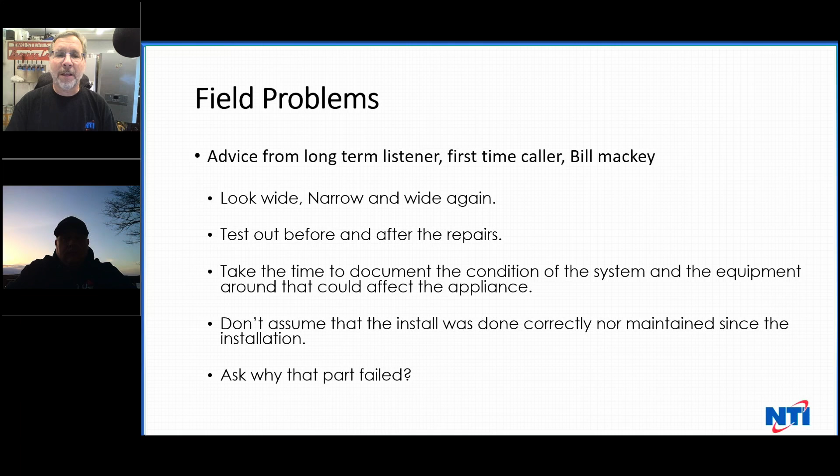Ted disappeared. Huh. Oh, he's back again. Yeah, I'm having some weird problems. Sorry. Okay. Well, it's all right, Ted. You were in a rush trying to get in here. I thank you for joining us.

So field problems. Advice from me on field problems. So this is how I look at things. Always consider first to call our technical line, 1-800-688-2575 extension 1. Reach out to your wholesaler's TSA group. They sold it to you, and most wholesalers have a technical service advisor group that will come out and actually help you on the job.

Now, see, that's important that you tell them that, because they need it. The wholesaler needs to be in the loop, because they're sometimes in the dark when they're talking to you and I or Ted. So they need to be in the loop. Yep. Consider calling your local manufacturer's rep. All of my reps have somebody technical on staff that can help you out and come to job sites. Ted's reps are pretty much the same way.

So we're here to help you, and they're here to help you. Always feel free to call Jason, Ted, and me. And I know for a fact that the other day one of my customers could not reach me, and knows Ted through 62 episodes of Thirsty Thursday, and he picked up the phone and called Ted. Ted helped him out, and I get a text message as I'm walking out of my corporate meeting that says simply, "Don't bother calling me. I talked to Ted and he solved my problem." Woo, it was great. It was excellent. And thank you, Ted, for doing that.

Sure. That's one thing. I mean, we got a great team, and we treat it like a team. And I've done the same for Ted. Ted and I have covered each other's butt. Jason's done the same for Ted and I. Jason does it for everybody. Mm-hmm.

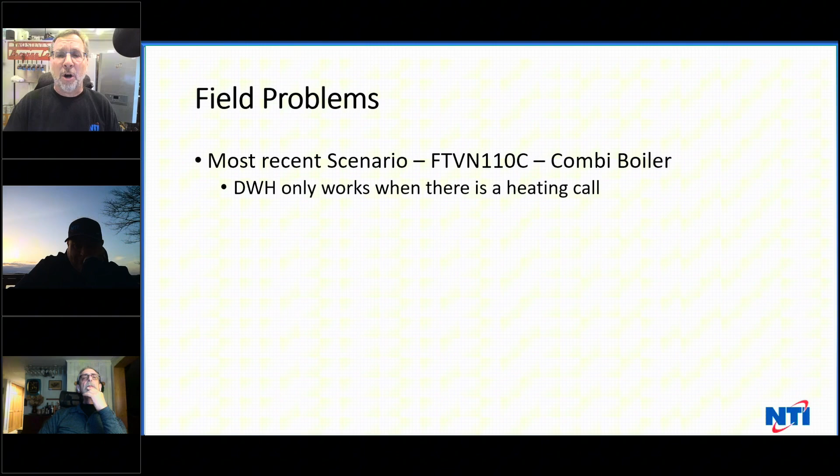So field problems. Here's one that I just had this week. Most recent scenario was on a FTVN 110 combi. I was probably 300 miles from my house. I had a great contractor who called me up, and she's just very thorough, very good. She's being thrown out on a lot of jobs for her boss that she didn't install, so she doesn't know what she's walking into. And she said the domestic hot water only works when there is a heating call on a combi. When there's no heating call, the boiler pressure drops to 0. So now it goes off on a low pressure error, which we know is a 108, but it doesn't matter. It's a low pressure error and the boiler won't fire.

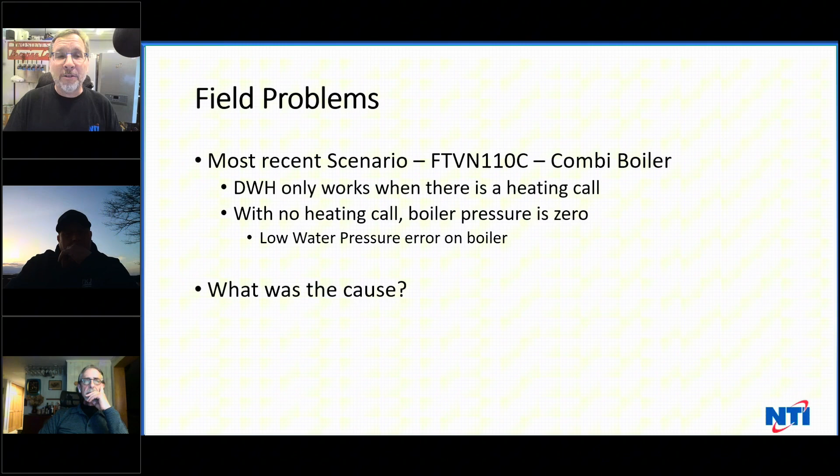What was the cause? So Jason, would you bring up poll question number 1? Can you, or do you want me to do it? Or Ted, do you want to do poll question 1? Who wants to do it? Let me get to it. I got it. Poll question. Ted can read it. I'll bring it up. Poll question number 1. Boom! Launch that bad boy. We ain't launched these in a long time. Quick poll here.

What is the zero pressure reason? What's the reason for that zero pressure? A bad fill valve, a bad pressure switch, a bad expansion tank, or wrong air pressure, or incorrect piping? Sounds like 5 choices, but really it's only 4 because tank and pressure go together. Right.

Yes. So how's that going, boys? Is everybody answering the questions? I think it's going good. Looks like we've got 71%. 76% have voted. Yeah. Incorrect piping is in the lead.

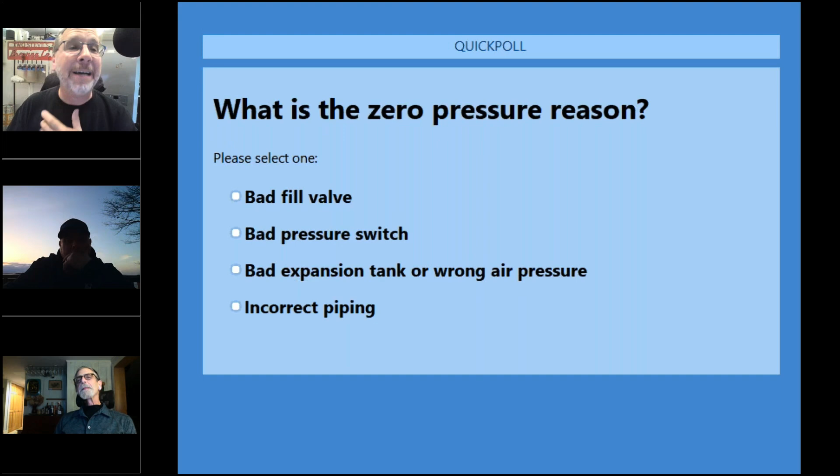Time's up. 1 minute. Here we go. 31% incorrect piping. 23% bad expansion tank or wrong air pressure. 15% say bad pressure switch. Oh, I'm sorry, it's a tie. I'm missing something. Bad fill valve. Ties at 31. Wow. Well, this is awesome. This is great. Yeah, this is really good. You can end the poll, Jason.

And Ted, your microphone's going in and out, just so you know. Yeah, I've had all kinds of problems here tonight.

This is how I started with the contractor, with the tech in the field. My office said it was a bad pressure switch and we'll send you a new pressure switch. In the meantime, she said, let me call Steve, because I've helped her out before, so she called me. And these are the questions I asked. I said, is the boiler piped primary, secondary? And she said yes.

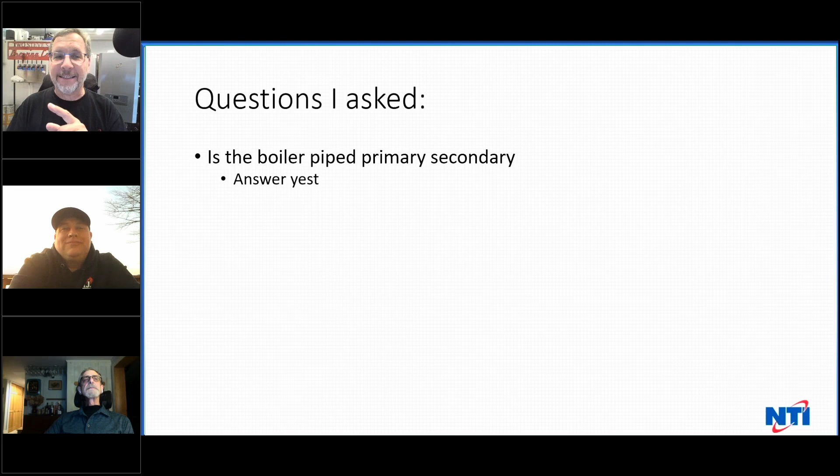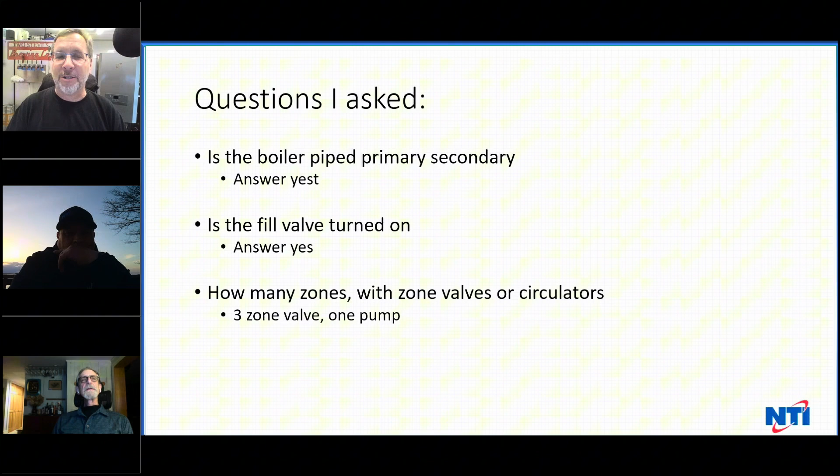I said, "Is the fill valve turned on?" And she said yes. And I said, "How many zones? And are you zoned with zone valves or circulators?" And she said 3 zone valves and a pump. And my final question to her was, where is the expansion tank located? Is it in series coming off the boiler? So let's go to the next 2 slides.

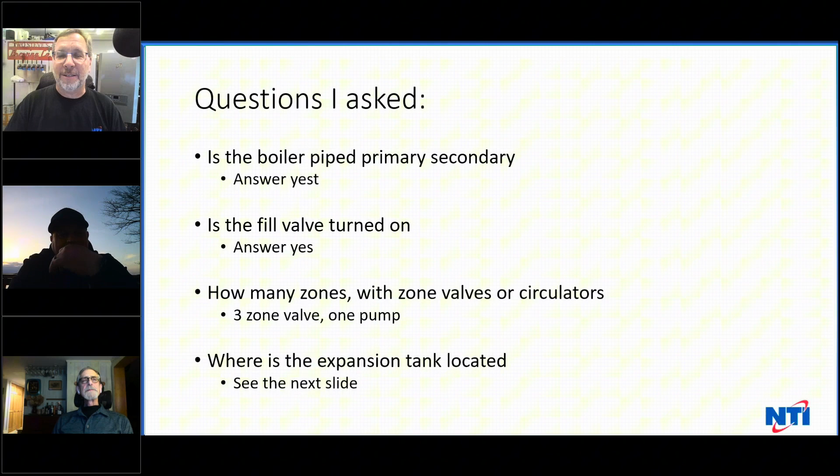When the heating calls, now it sees the expansion tank, because the expansion tank serves 2 purposes. It creates your pressure and it gives you expansion area for the water to expand in. When that check valve opens up, it sees the tank now. It can make the pressure, it goes to 18 psi. It runs just fine, but as soon as the circulator turns off, the check valve closes, the boiler sees no more pressure. So I said to her to simply rip the check valve out for now and tell your guys to go back in and repipe it later.

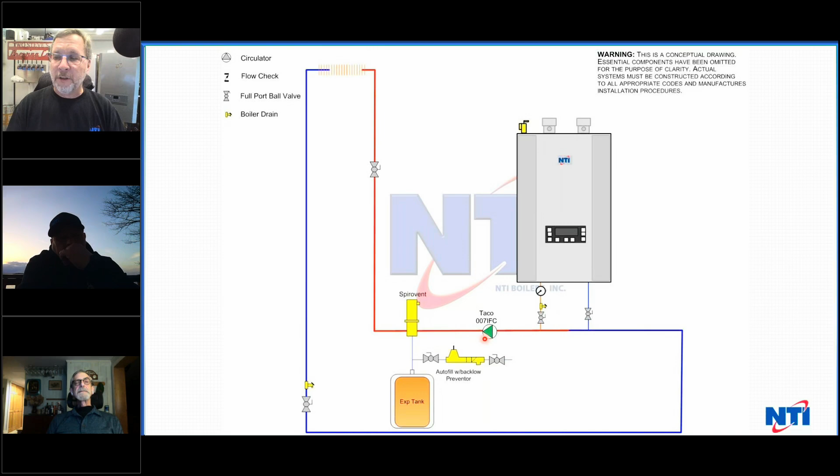You want to get off the job. It's Saturday afternoon at 5 o'clock. Take your needle nose plier, take the pump out, 4 bolts, rip that check valve out because you don't need it with zone valves. I would have moved the pump. Put the circulator back in and tell your guys to go back next week and repipe it the way that we show in our installation and operation manual. This is a very typical story.

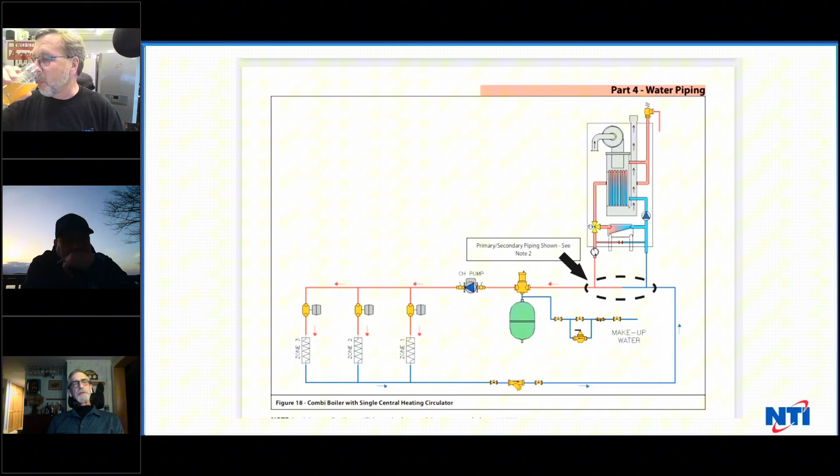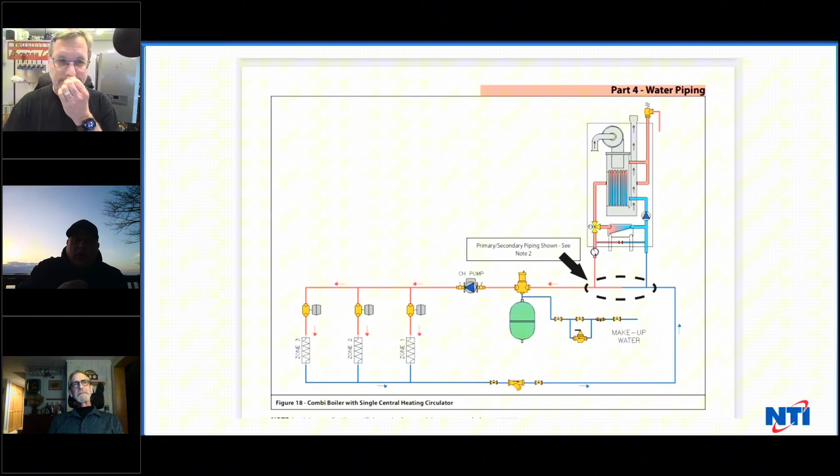What's that, Ted? I say the short story is you absolutely never pump into the expansion tank. That's because it will create air to be sucked into the system. That is like the biggest. That's why I was doing the Holy Cross, because I'm like, holy moly, you just did 2 of the worst things in the world. Number one is you're pumping into an expansion tank, which you should not be doing, because certain boilers, depending on how they're configured, will isolate the expansion tank depending on their operational mode. Well, you had the best one of all, Steve.

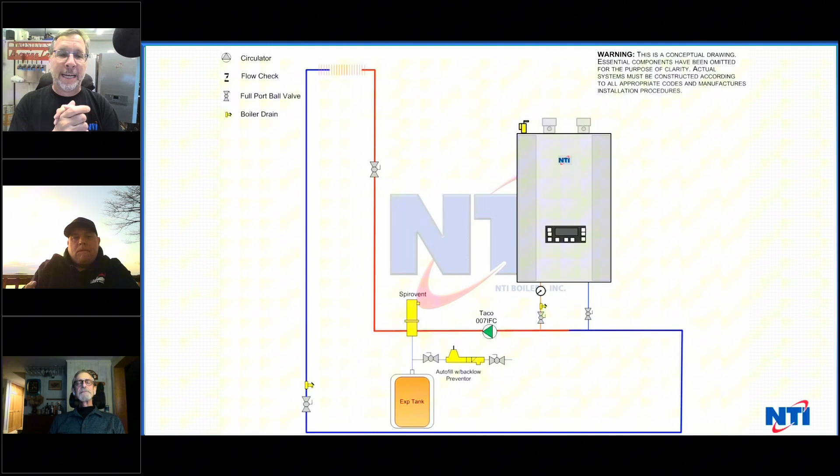I suggest if you've never gotten it and if you haven't read it, that you buy Dan Holohan's Pumping Away. When that book came out, it explained the world to me in a very easy way and changed my entire outlook on piping boilers and what an expansion tank does in a very easy and simple manner. It was the best $20 I ever paid. So buy it, enjoy it. One of the best books written for the hydronic industry.

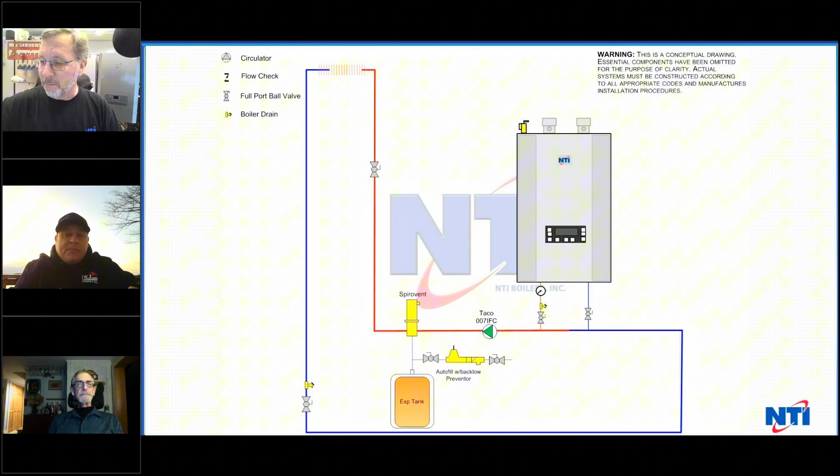Yes, it is. That was one art that Dan has. He can talk to anybody and educate you. If you read his books, you can tell that by the way he writes. When you read it, he's talking to the technician like we all do. That's what you got to do.

Steve, what you just did there with that lady, you educated her. See what I'm saying? You educate.

I was 400 miles away, and I can guarantee, I haven't looked to see if she's online tonight, but I can guarantee one of the next things I'm doing tomorrow is to buy and send her something, because she understood by me just talking to her what she needed to do, handled it, and 30 minutes later she sent me a text going, 'The system's working, everything's cool, thank you so much, I'll talk to you later.'

So how fun's that, right? That's great. See, now that's a win. Win-win. That's a win-win right there.

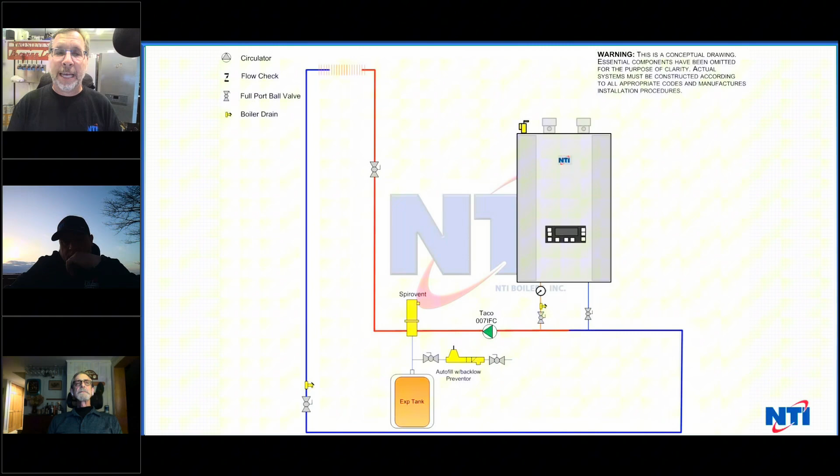For the last 3 months, they've been turning a thermostat on every time they wanted to get a shower. The customer understood the problem. The contractor didn't know what the problem was. So that was pretty funny.

But anyway, all right, there's my little note: move the circulator pump so you're pumping away, which is what we were all just talking about. Right?

Because remember, the pump uses the expansion tank as a reference point. Whatever it's set for, it's going to maintain. You have 16 psi, you have 16 psi. It's the way it's laid out. The tank is your point of no pressure change, and we've covered expansion tanks a dozen times here.

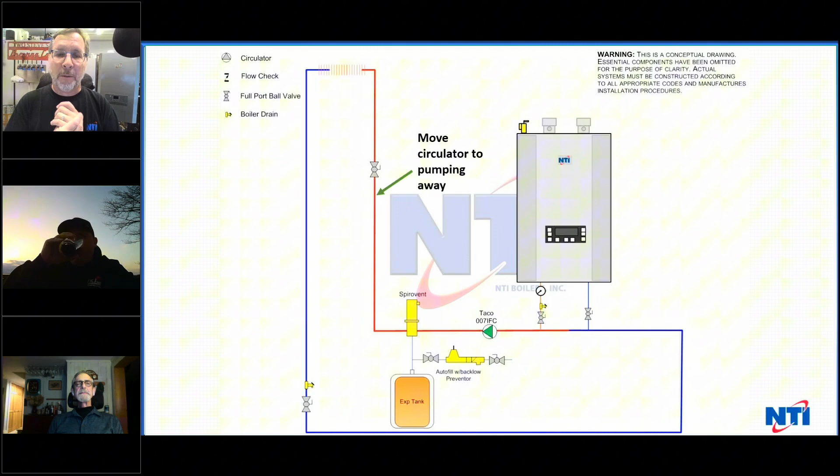If you're not checking the pressure on your expansion tanks on the air side before you put them in, all these systems with the FTVN and the TRX, I would suggest now with most boilers, instead of a 12-pound system, you run an 18-pound system, because it ensures that your pressure switches that are built in will maintain pressure during run time.

All right, so this is not to say that we're not at fault. How was that for a double negative, Ted? Yeah, that's it. Hey, you just did that. Was a good one. You just run with this. Keep going, get past it.

Go, wait a minute. So, no, Tyler said even cast iron boilers. Cast iron boilers don't have pressure switches in them, Tyler. So no, you can run a cast iron boiler at 12 pounds. That doesn't matter anyway.

So this is not to say, hey, Jason's having a heart attack. What's going on there? Something couldn't ask. He's sitting right next to me. Couldn't ask me that.

TV90 has pressure switches. Thank you, TV90 Tyler. Anyway, so this is not to say we're not at fault.

Keep in mind that we really do care. Everybody on the screen, everybody at NTI, everybody we work with. Ted and I have been with this company, what, 12 years now, Ted? Yep, 12 years as direct employees, and before that, I was 2 years as the manufacturer's rep. And I can tell you this: that we really do care.

Keep that in mind. We're constantly trying to improve as a company, and that's mostly because of your feedback and what Ted and I hear in the field. We take it right back to the factory. Trust me when I say that. Ted and I and Jason are on meetings every Monday, and we discuss everything that you guys tell us. And when I say everything, I mean sometimes the meetings get very long.

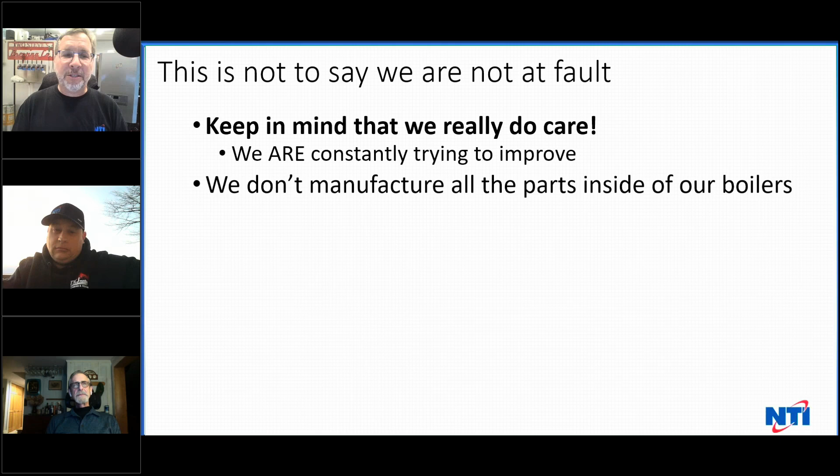Some of the parts we manufacture, but not all the parts do we manufacture. We don't put them in there. I don't know what Jason's doing, but I'm about to mute him. Yeah, you might have to.

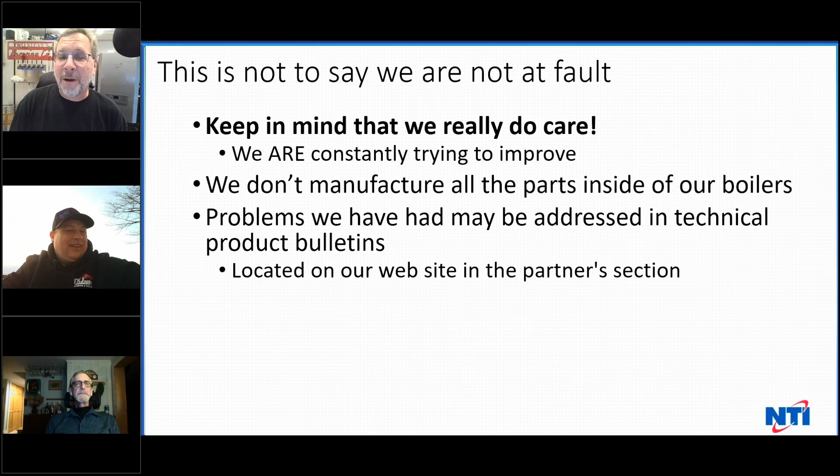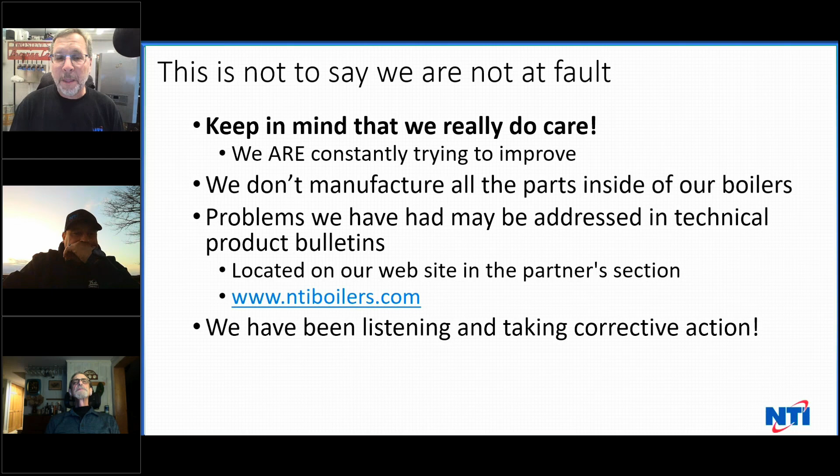Problems we've had may be addressed in technical bulletins, and I'm going to show you the technical bulletins in a minute. They're located on our website in a little area called the partners area, or partner section, at www.ntiboilers.com. We've been listening, and believe me, when I say we're taking corrective action, we are taking corrective action. Sometimes in the past the reaction wasn't as fast, but I can tell you that has speeded up dramatically.

So Jason, if you would launch poll question number 2 while you're having the sunset there in the distance. I got it, dude, I like this. There's a little island over here. He tells me people live over here. I'm like, oh really? All right, here we go.

Poll question number 2 launched. Did you know about the partner site? This is fairly easy: No. Yes, but I never registered. Yes, but I forgot my password. And yes, but I never use it. So we got 3 variations on yes and a hard no. What are you going to do? You noticed I did not put in there 'yes, and I use it every week.' You noticed I did not put that there.

No, I noticed that. Oh my God, answer the questions, boys. All right, yeah, and they're girls. They're voting. Time's ticking here, we got 4 more seconds. What's that damn music called? Jeopardy. Jason, you got it? Yep. All right, stop, so we're good. All right, so we have, let me kill my music. 42. What the hell's with the music?

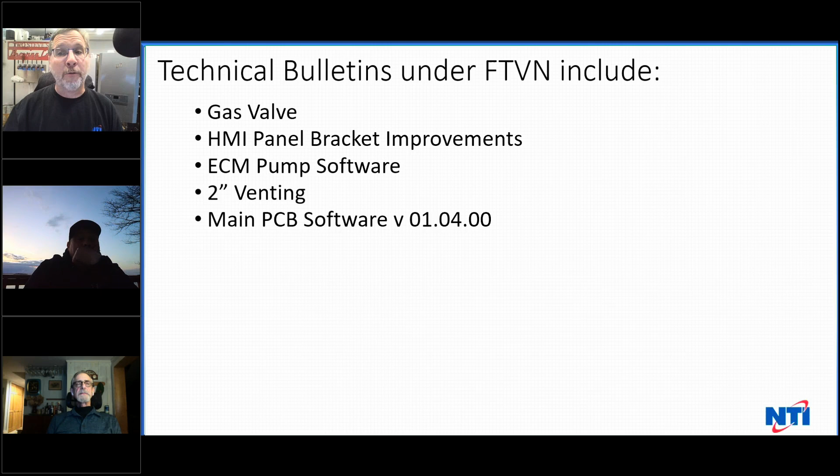There's a gas valve bulletin, HMI panel bracket improvements, ECM pump software, 2-inch venting, main PCB software update. There were 4 of those, and the last one happened to be 1.0400. TRX and FTVN fittings, cascade instructions, plumbing schematic corrections. TRX FTVN will not go into high fire. FTVN combi won't show any domestic hot water flow, and locking the diverter valve in central heat mode.

Now that was the ones listed, right? So far, so good. So I just want to take a look at one or two of them, and we're going to discuss some of the others. So this is the gas valve.

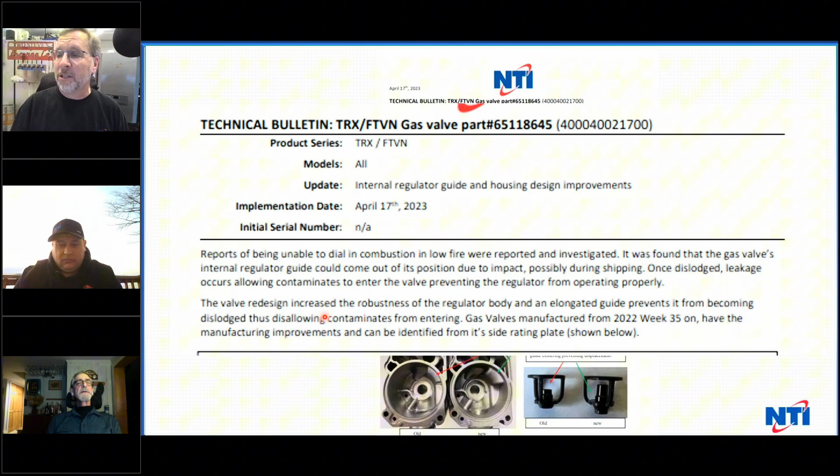You might wonder, why did we come out with a gas valve bulletin? It's because reports of being unable to dial in combustion in low fire were reported and investigated. It was found that the gas valve's internal regulator guide could come out of position due to a high impact, possibly during shipping. Once dislodged, leakage occurs, allowing contaminants to enter the valve, preventing the regulator from operating properly. The valve redesign increased the robustness of the regulator body and elongated guides, preventing it from becoming dislodged, thus disallowing contaminants from entering the gas valve.

Manufactured from 2022, week 35, and later have the manufactured improvements. Now, when you bring this up, you'll notice this right here in the middle of the technical bulletin shows you how to tell what you have and shows you what the problem is.

So please, if you have this problem where you can't adjust the low fire, go see this, and you can look at the gas valve, check the date code, and call the technical department and they'll send you a new gas valve to replace it.

Yes, Jason? I thought he was waving goodbye. No, or no way in hell.

Or if you set this low fire, you go back because it's locked out on a 501. You need to immediately look at that gas valve, because if the low fire is off, you need to verify that's not the gas valve in that series. You need to get in there right away. If you go back after, it could happen, but it's going to happen within a month. I'm telling you.

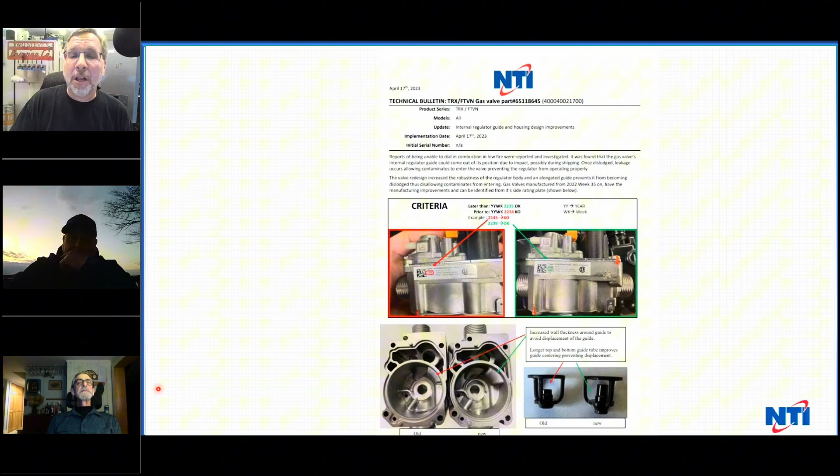This happened April of last year, and it shows up when you guys go out and do a combustion analysis on your annual maintenance. So you'll be able to tell it then.

So now that in mind, I want to take a moment to address a couple other things, because again, we're not perfect. The HMI panel bracket improvements - we've increased the robustness of the brackets that hold the HMI.

That's the push button actual screen. When you push the buttons, if they don't click, it's because the panel has come off the back due to somebody dropping it more than 6 inches, we determined. We've built that bracket heavier and done things to improve that, but now we have a final improvement we've done the drop test on, and it should be final - you don't have to take the panel down, just press the board back in and put it back into place.

The ECM software was based on people having lights flashing on some of the earlier models of the Taco pumps, where Jason will tell you firsthand that 90% of the pumps we got back were working just fine if you just clean the magnetite out of them - we go back to water quality on that.

2-inch venting - if you read that product bulletin, you would find out about the 2-inch venting. I had that today. The guy said, 'Uncle Steve, I gotta tell you the story.'

The technician, a great guy, showed me the pictures. He's like, Jason, what do you think? I said, oh, you got a little magnetite coming out there. And the owner of the building says, oh no, good water coming to the street. I said, it doesn't matter what's coming from the street, what's in the system. He said, I'm going to call your boss. I said, whatever, it's in the manual. I said probably about 167 times, maybe.

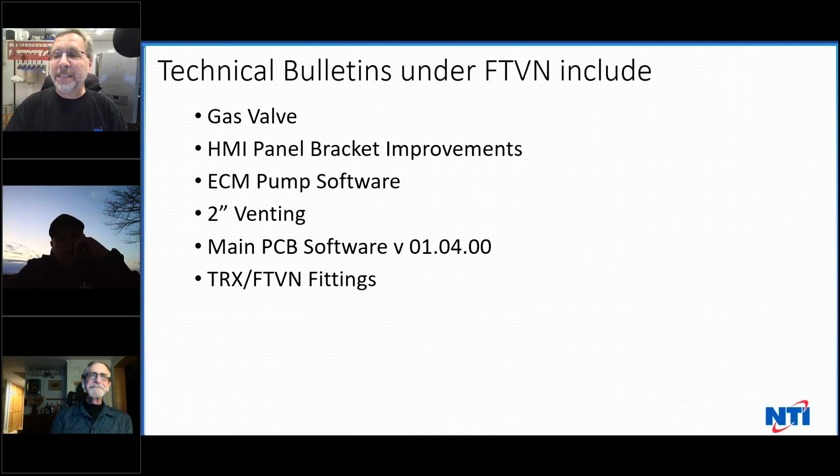Now let's look at the TRX and the FTVN fittings. I get a lot of people who have drippy fittings, and I can't say a lot. In the world of boilers, we're still looking at under 1% of the boilers forming a leak. I know some of you had more, some of you had less, I can't help that. But we've taken other things beyond this product bulletin I'm about to show you.

Now folks, I'm going to tell you this. A lot of people on this call have used the FTV boiler, which is the exact same gasket, well, prior to COVID. We don't know what's changed during COVID, but the FTV had the same nuts and the same gasket. So what changed? On the FTV, we didn't have torque meters, and on the FTV, they weren't on an assembly line.

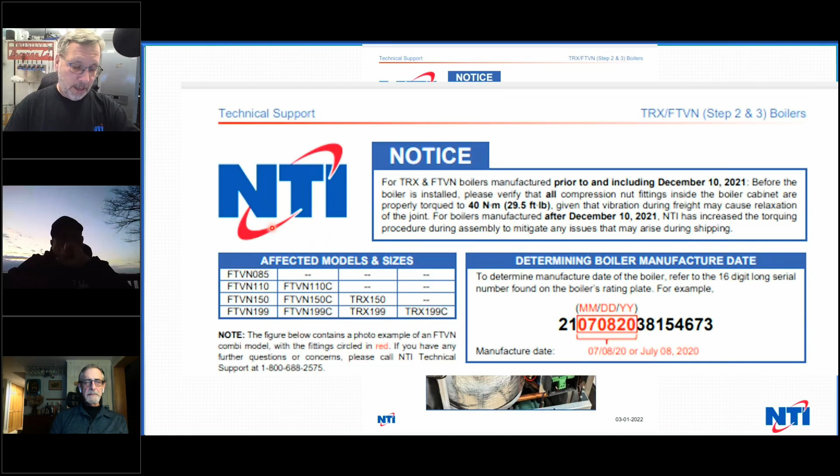If you have a leaky fitting inside the boiler, you're more than welcome to call the tech department and order the Kevlar fitting, the Kevlar gaskets, which Milik said are the best things you guys ever did. We are switching totally to them. The reason I was against this Kevlar gasket from the beginning was what I went through with a company that might rhyme with Uzbo or Apanor, using what looked like a paper gasket, which it was, and they told you to soak said gasket for 2 hours prior to installing it, which none of us ever did, and they leaked hardware. So these are Kevlar gaskets, they're not paper, they're Kevlar, and they work great. So, Uncle Steve, the other thing I want to chime in here a second.

Not just the gasket, you have to replace the gaskets on the 2 heat exchangers and on the pump. But then, guys, let us know, because we can send you sensors. You're going to replace that bottom sensor, it may have been compromised from the water leaking on it. Water's leaking on the sensor, it may have gotten damaged. So we may have to send you a sensor or two on top of the gaskets. And let us know how bad it is.

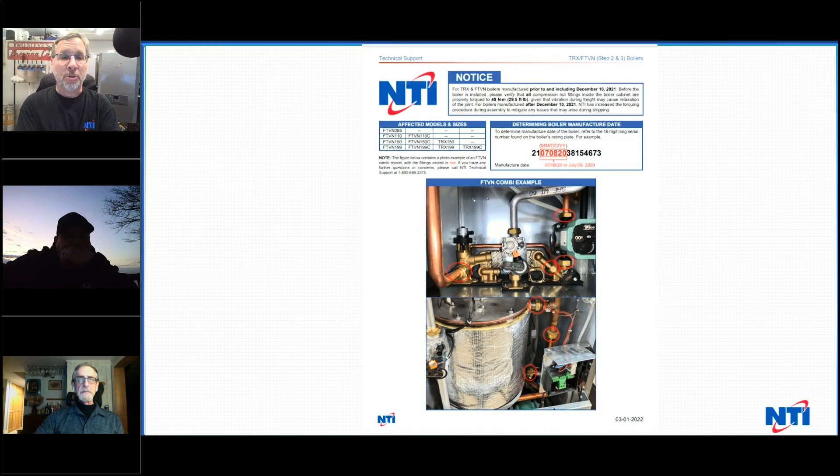You really need to verify how bad the water leak is before you call us. I'm just going out there, so I can say that the Kevlar gaskets are working well. Again, this only affects less than 1% of boilers sent out, but I know good friends of mine have had this issue. I know good friends of mine here tonight have gotten the Kevlar gaskets. I know some people have just tightened them up. I know that the resolutions are all working, and I know we've been on top of it to try to come up with a resolution. So please don't think we're not listening, because we've been working on a solution in the background.

So we don't have to worry about torque specs. Because with the Kevlar gasket, there's one torque spec: the nut stops. That's it, there's no torque spec. It's like metal to metal. Hey, keep it, just tighten it up and rock and roll with it.

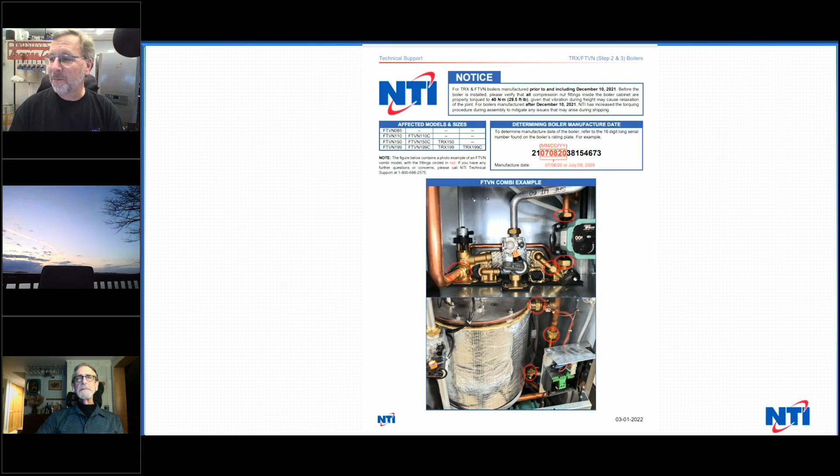Ted and Jason, I'm going to go back here a second. Do you have anything to add on any of these before I move on to parts availability? No, I mean, I would say you covered all the high points. Obviously, if you're going to do cascading, the instructions are there. And certainly tech support can help you through it, but it's really pretty simple. Setting it up, if you read the instructions, beyond that.

Like locking the boiler, locking the diverter valve, that's on there, on the partner login right under your FTVN. Jason, yeah, Ted just said that. You covered everything, Steve. These are all the technical bulletins that are under the FTVN, that's all of them that are listed. Really, and if you have any other series, you just go to the heading for that series, like Steve showed you at the beginning. Every boiler we made has one, or you can look at all of them if you've got nothing else to do and you want to do a lot of technical reading.

Steve, you'll like this one. I gotta tell you about this one. Nobody knows, but Steve's famous for one of those tech bulletins. I'll go back a little bit, Steve, you'll remember once I start talking about it. You and I and Steve were on the phone with Jason in Regalsville, Cooper Mechanical. Oh yeah, here it comes.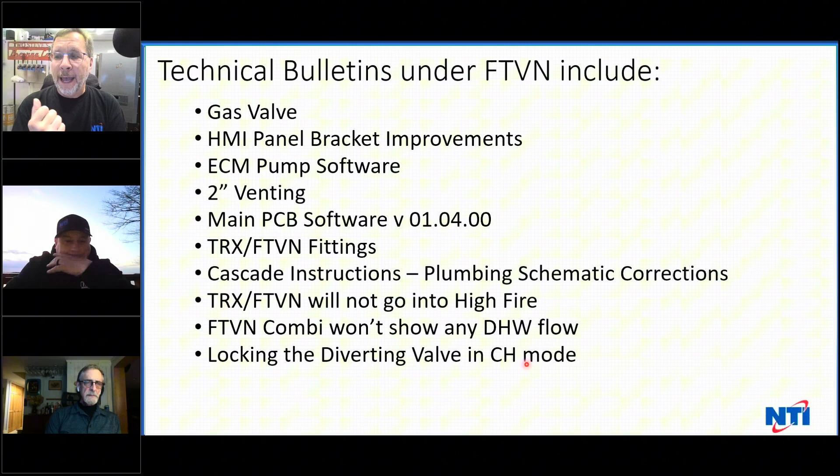We rewrote the software 4 or 5 times to make sure that we stopped the slapping noise and the banging noise and the chattering noise. It's all settable within the software. And that is what drove Ted and I to have them draw up this product bulletin on locking the diverting valve in the central heat mode.

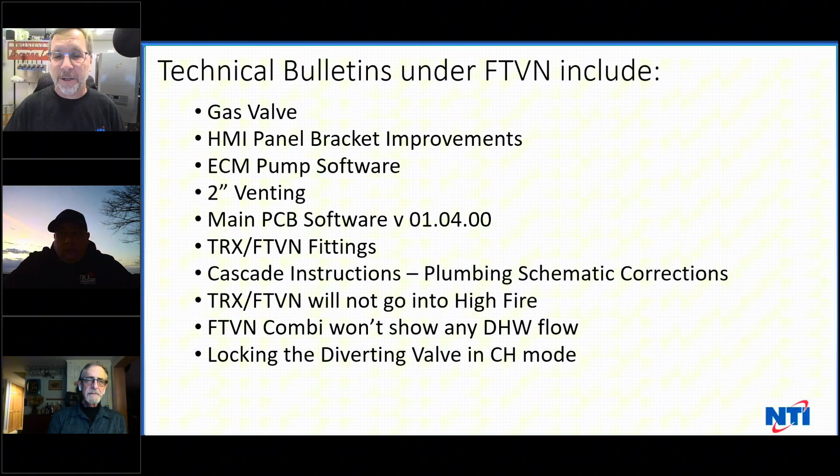If you do not use the boiler for domestic, whether it's heating or combi, if you're not using domestic, please follow these directions, which say, give it a call for heat, wait till the valve travels all the way down to the heating mode and disconnect the electric cord. But you can read that product bulletin instead. Right, Ted? There you go. There it is in a nutshell. And Ted and I were very influential on coming up with this, because we've been telling people to do that for 3 years. Anyway, let's move on here and let's talk.

So we've been horrible on parts since last June. Absolutely horrible. Absolutely 100%. We've been sucking the back end of a donkey for 6 to 12 months on parts. But let me tell you what we've been doing. So our tech department now can ship you the parts that they suggest for you to replace. And when they give you the option to buy it locally or have them ship it, tell them to ship it. Keep in mind that overnight air from Canada is 3 days because of customs.

We can't change that. If we have it in one of our stateside distribution centers, we may or may not send it from those depending on your need for heat or lack of domestic. We're taking steps to improve it. And I can tell you this, that Ted and I have both seen, and so has Jason, in the past 2 months and mostly the last 30 days, that our parts delivery has taken a dramatic turn for the best, which has been phenomenal. Ted and I are not used to this. We've been here 12 years and we've never had this problem.